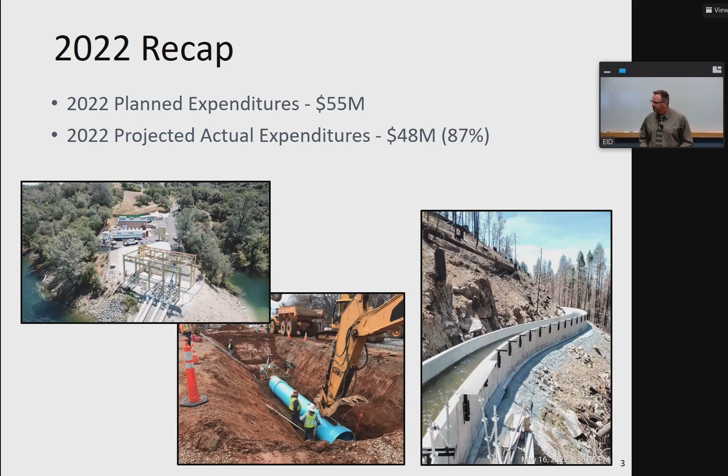Next slide. So this is a list of some of the completed projects, and I won't go through all the details of these. Elizabeth Dawson has been to the board previously with status of a lot of these projects.

But as far as some of the big ones, the Folsom Lake intake replacement was completed, the main ditch pipeline, and then we also had the Flume 30 and Flume 4, 5, and 6 replacement due to the Caldor fire. We also have wastewater collection system pipeline rehab projects completed, some of our battery storage projects at our water and wastewater facilities, and others. This is just a short list of some of them, and then we've got a lot of different projects in the pipeline or completed this last year.

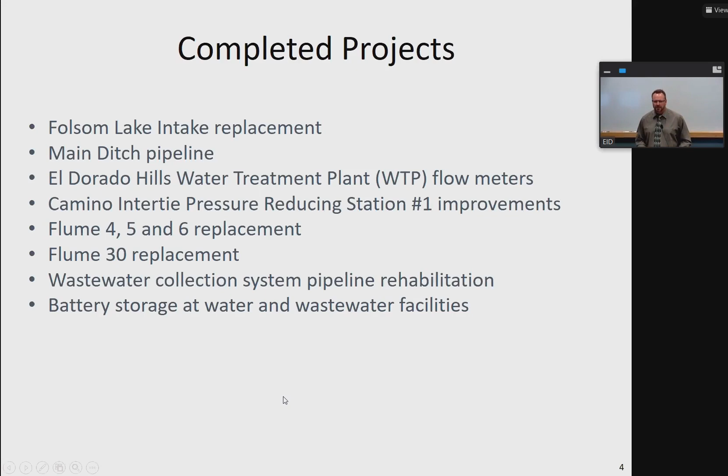Next slide. This is just some of the pictures of the Folsom Lake intake replacement. This is about a $42 million project, started in 2020 and completed in 2022. This project really improves the reliability, replaces 1950s, 1960s era pumping facilities that have been in place since then, really improving the reliability of our water delivery system, taking our supplies out of Folsom Lake.

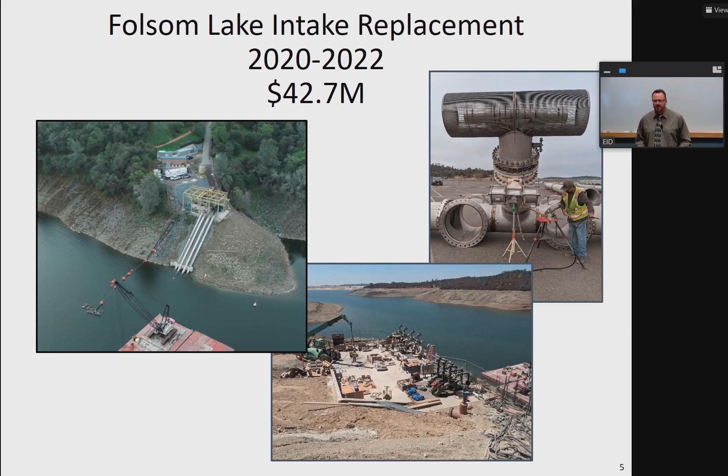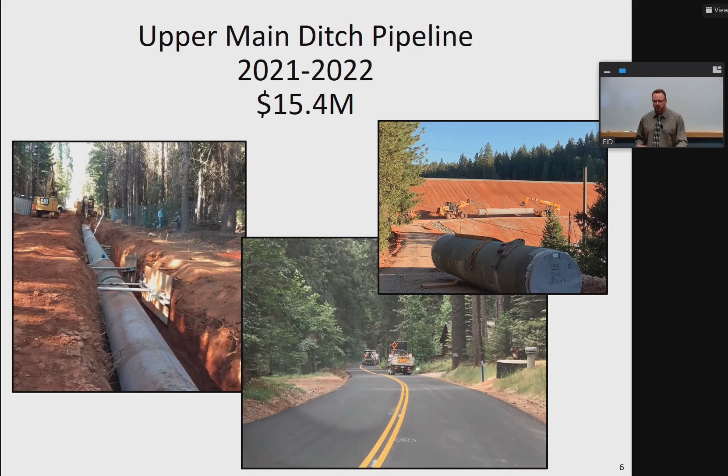Next slide. On the upper end of our system, the upper main ditch pipeline replaced our previous open conveyance. It's really going to help with improved water loss and improved source water quality to one of our treatment plants in Pollock Pines.

Next slide. And again, the Flumes 4, 5, 6, and 30 replacement, about $27 million was expended there for those 4 flume replacement projects.

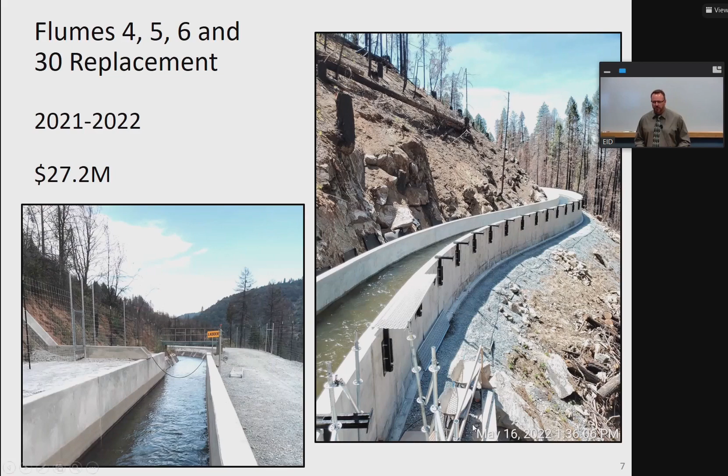Some of the projects that are under construction right now that the board has approved include the Flume 45 abutment section replacement. This is a small section of our overall Flume 45 system, and I'll talk a little bit more about future projects in the Flume replacement program. We've also got a little bit of work to stabilize some of the burn slopes resulting from the fire along the El Dorado Canal. We're in the process of upgrading our crew room up at Camp 5.

We're also going through a PLC, programmable logic controller, replacement at our Reservoir A water treatment plant. The collections facility relocation is well underway and hopefully will be completed by the end of the year, as well as the headquarters battery storage and backup generator project, which is right here at headquarters.

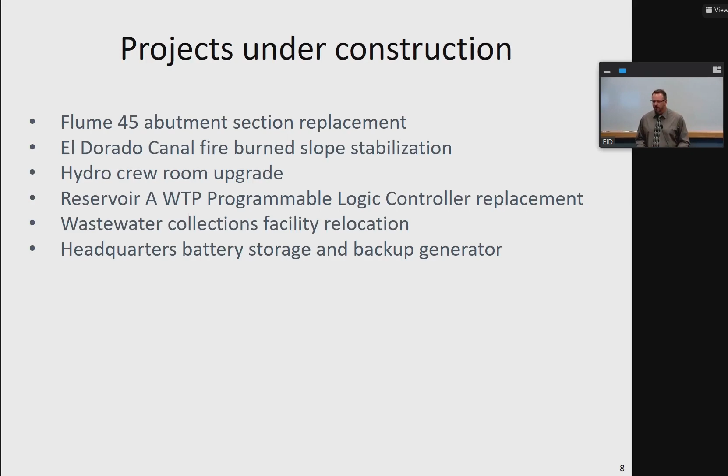Next slide. Going through some pictures and the cost of the Flume 45 abutment section under construction now is about $3.7 million. That'll replace that old section in the middle there, and also have improvements to these old rock wall abutments that are unstable.

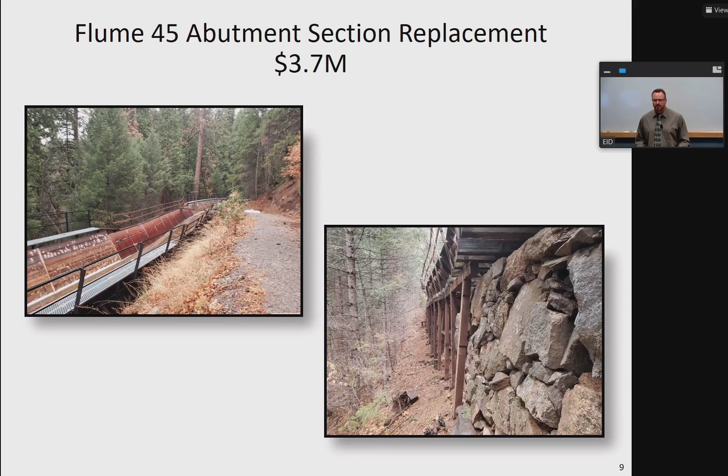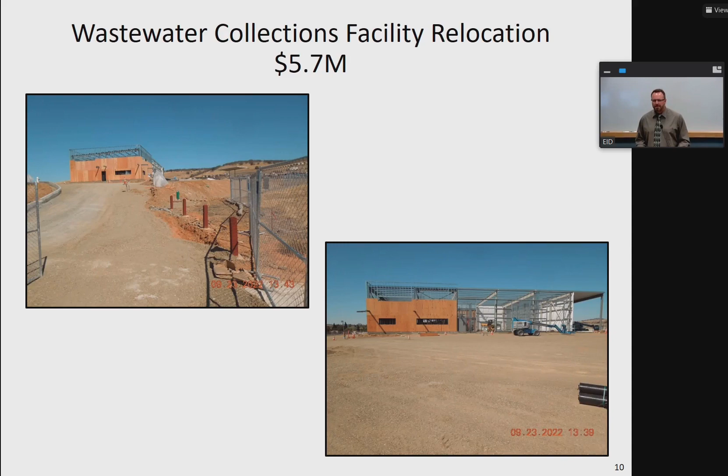And then also that will allow us to add a place of use of storage at Jenkinson Lake to be able to use that in other parts of our system. We're in the process of updating our water master plan. Also in the process of designing the Sly Park intertie replacement, which will be a large project in our next 5-year plan.

Moving into the flumes, again, Flume 45 Section 3 is under design, as well as Flume 48. You heard about the Silver Lake Dam replacement, I believe, at the last board meeting, as well as we've got some penstock improvements that's following up on some condition assessment we did on the penstock facilities several years ago.

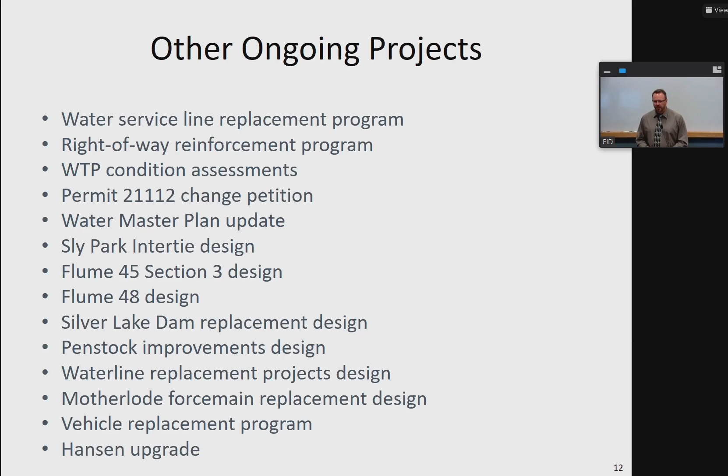So those are some of the ongoing projects. And then now moving into the 2023 to 2027 timeframe for the CIP and what we prepared. Next slide.

So each summer our staff begins this process. And it really starts with a lot of meetings with our engineers and project managers in both engineering and operations, working on updating the status of all of our projects, plugging those projects into updated worksheets and developing new funding estimates. And then we meet with each group and kind of kick around all these projects, what needs to be done now, what can be pushed off a little bit.

The initial draft that we always see always starts with a higher number, and that's what those meetings are for, to work to try to reduce that to a more realistic number as far as staff workload, as well as within our financial constraints. So this year, the initial draft totaled about $270 million. After our staff was done working through that, it was reduced to about $230 million, which is what you see before you today.

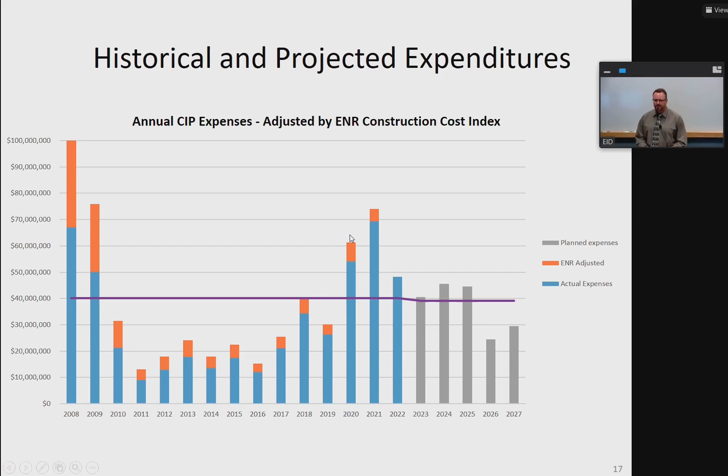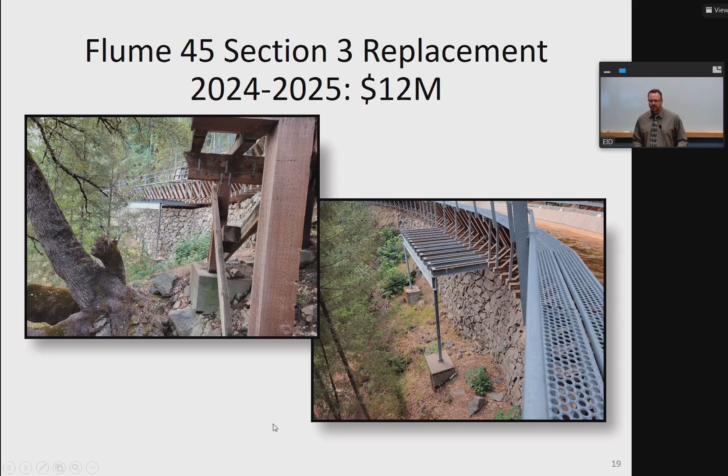This is the Flume 45 Section 3 replacement.

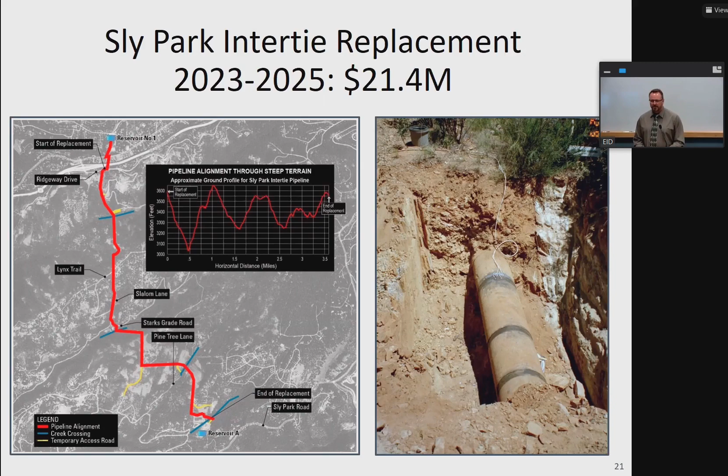We've got several water treatment plant improvements that aren't yet identified as specific projects. We've been going through condition assessments of our treatment plants, specifically focused on Reservoir 1 and El Dorado Hills water treatment plants, since that's where a lot of our future expenditures will need to go toward replacing assets. So we've got about $12 million identified right now in the 5-year plan.

A lot of that isn't solid yet as far as what projects would be funded, and that number could definitely increase. We just need about another year to go through the process to identify those projects, their timing and cost, to then plug that into the CIP.

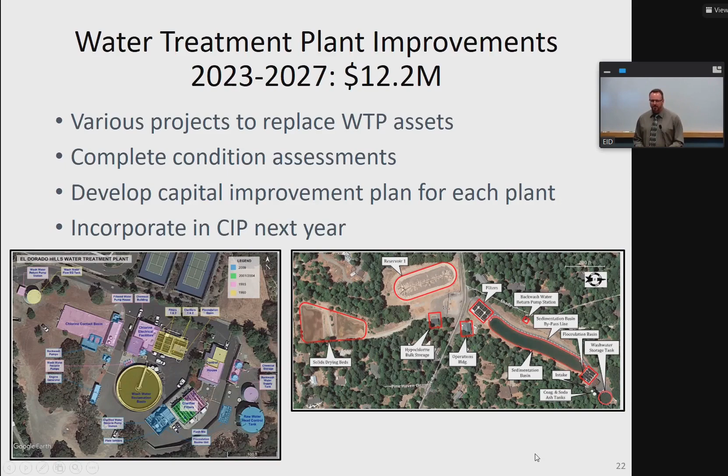Moving forward with water line replacements, we've got about $21 million over the next 5 years for replacing water lines. At the top of the list is a water line on Forebay Road that's a real leaker, actually impacting our 14-mile tunnel that goes under Forebay Road into Forebay Reservoir, as well as Drop-off Road nearby.

Also a pipeline in Sly Park Hills that feeds a tank up there. So those are the 3 main water line replacement projects, but we've also got about $5 million beyond those, planned annually between 2025 and 2027.

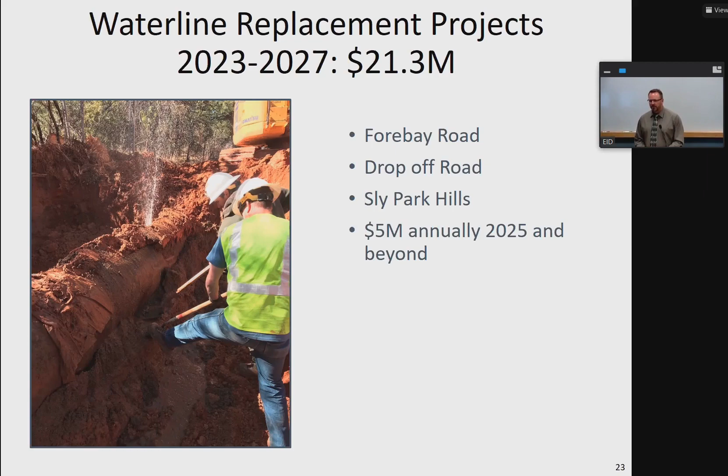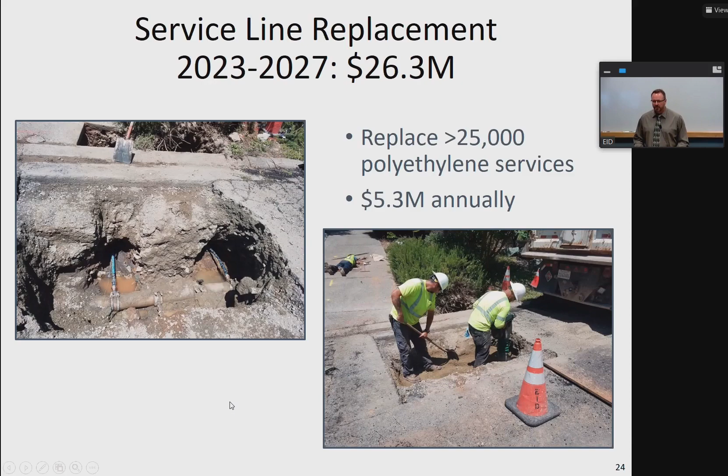We've also got our ongoing service line replacement program, about $26 million total, continuing to plug away at replacing service lines, about $5 million annually.

I mentioned the Silver Lake Dam replacement, about $3 million slated right now in the 5-year plan. This is for the design, environmental, and permitting aspects. Hopefully by next spring we'll have about a 30% design completed, which will include a construction cost estimate.

So this time next year, as we go through the CIP process, we'll have those construction dollars and a better sense of the timing for that project.

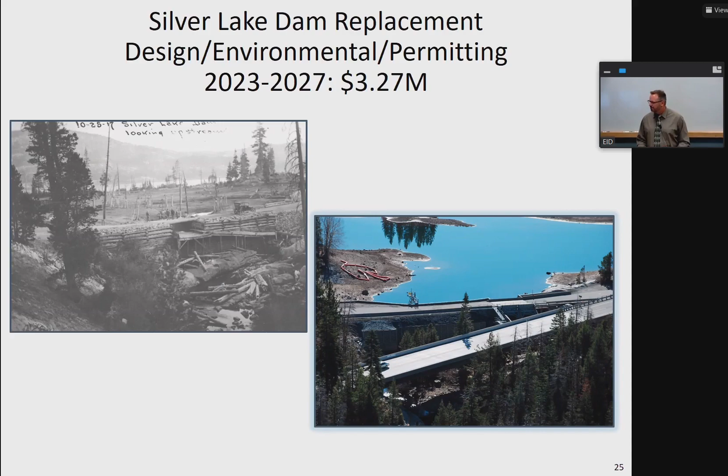Can you give us a ballpark? I know we tried this last time. Well, with our experience on Forebay, you'd think that'd be kind of a benchmark, so I'm guessing 40 to 50 million. I hope it's not that much.

I think it's going to be cheaper than that, but I don't know. If you're comparing with Forebay, all we're talking about here is concrete, and it's probably going to be like a 1-year project. As soon as it's open and the snow melts up there, we've got to get in, tear it out, replace it, and get it online before next winter. So it's not going to be a long, 3-year project like Forebay was. I'm hoping it comes in lower than that.

Okay, we won't hold you to it. We'll wait till we get the actual numbers. Thanks. Yeah, sure. Thank you.

Disappearing ink there, yeah. No, but the YouTube tells everything. Yeah, that's right.

Moving on to the wastewater side, we've got about $10 million planned for wastewater lift station upgrades. These are the pump stations that pump water over the hills to our wastewater treatment plants. There are 3 specific projects: Indian Creek Lift Station off Missouri Flat Road, and one of our largest lift stations in El Dorado Hills.

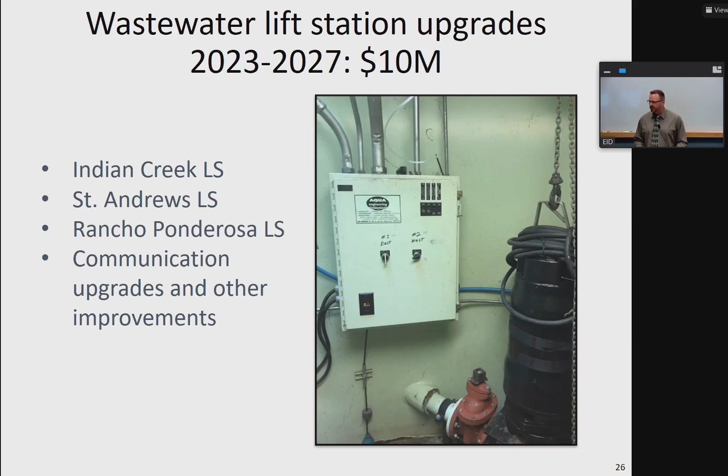The St. Andrews Lift Station, and then a small lift station, Rancho Ponderosa, in the Shingle Springs area. Besides improvements to the lift stations themselves, we've also got communication upgrades and smaller improvements to keep those running well.

For pipeline replacement on the wastewater system, the larger one is the Mother Lode Force Main replacement. We've got that under design and scheduled for construction in 2023, with about $15 million estimated for that project.

The Strolling Hills sewer line is a downstream component of that whole Force Main system, also in the 5-year plan. Liz will actually have a project today for replacing some gravity lines, using slip lining or small replacements across our overall collection system gravity pipelines.

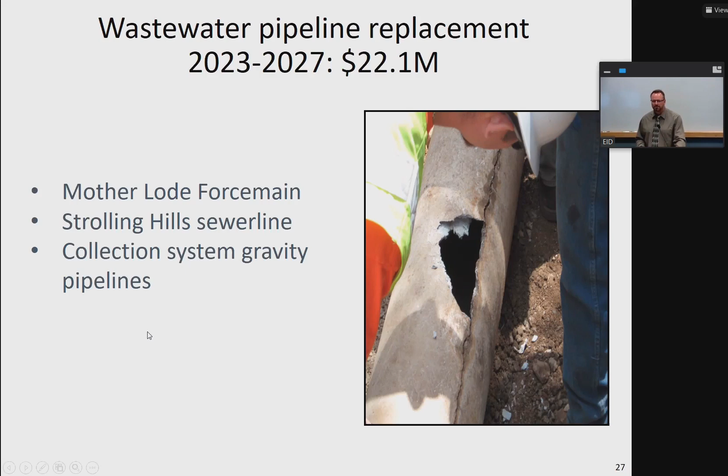And then finally, general district projects. These aren't specific to water or wastewater, more general projects including our Hansen 7 software replacement — we're in year 2 of a 3-year program for that. Our vehicle replacement program is about $8 million over the next 5 years, and various improvements to our IT systems are about $4 million.

We also have improvements to both our SCADA system and communication system between facilities, as well as safety or security improvements, about $2 million. And we've got facility improvements identified at the existing headquarters building — I believe the roof needs to be replaced, or the air conditioning unit. This building is getting fairly old and is due for some replacements.

So that just covers most of the projects, and then we get into the financing and how we're going to pay for all these projects. And like we do each year, we try to identify some of these larger projects that would fit a future bond issuance. In the last financial plan that was adopted, we identified a future bond issuance of about $100 million.

That was forecasted to be in 2025. We think, and we'll get into this in the next meeting as we go through the budget and updated financial plan, that this may need to be accelerated into 2024. But we'll have more info on that at the next meeting.

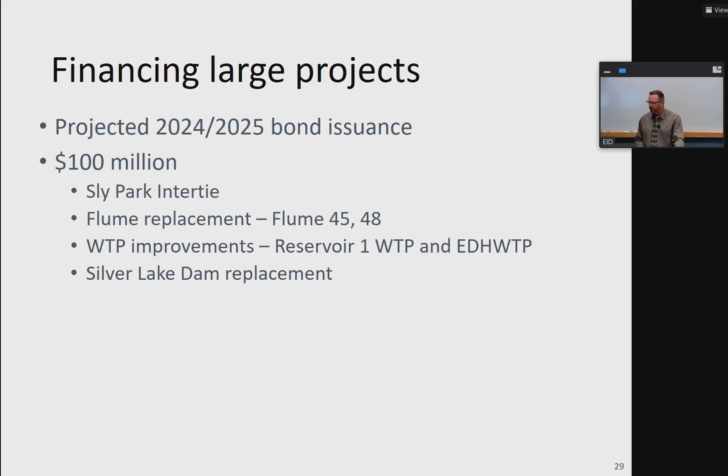Hey Brian, just to Director Dwyer's point about debt service - the $100 million a couple years ago with interest rates then versus what interest rates are now, we don't know what they'd be next year or in 2024, but probably higher. I think that's something we're going to have to talk about, a grave concern - the impact of $100 million at 5% versus when it was 2% or something like that. We need to be aware of that, especially for next year.

Certainly, before we go through and recommend issuing $100 million worth of bonds, we have to do a cost of service study update to determine what the rates would be. And I don't like going to bond like maybe some of the past general managers did. I'd like to go to bond with an approved financial plan and rates adopted by the board. It just works better with our bond rating folks as well. So yeah, the whole package.

Well, the evidence of that is what happened when we did the refinance, and the savings we realized from that was great. Thank you, Financial Department, for doing that, and Board. And so that did give us a little bit of headroom. It would seem to me that as we retire some of the previous bonds, then we bring the new bond issue on board, and again keep steady state instead of getting all these ups and downs.

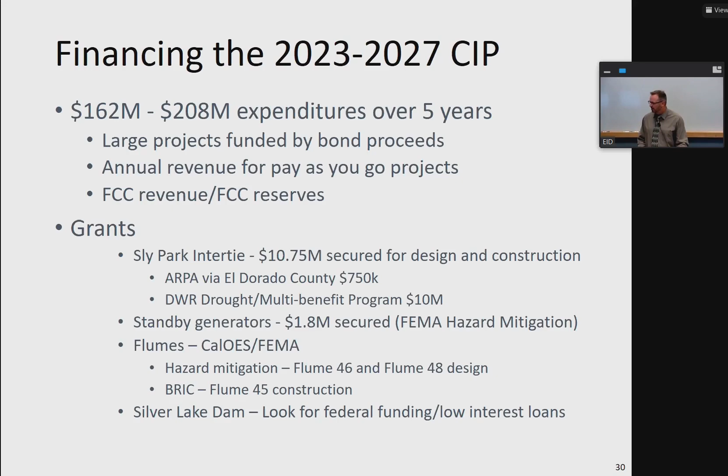So that's it for next steps. We'll possibly make further revisions based on any board or public input, incorporate the CIP into the operating budget and financial forecasts, and review that at the next meeting, along with the budget workshop, bringing back the CIP for formal board adoption.

Well, thank you for that. Any questions or comments? Yes, Director Veerkamp.

Hey Brian, Diamond Springs Parkway, I know that's finally going to get done, the second phase. Is there anything over there that we need to be concerned about? We'd talked a couple years ago about stub outs or sleeves, so in case there was any service needed to the north, we'd put it in once instead of digging it up again.

Are you talking about the connector between 49 and Missouri Flat? I think that's been planned for, but I'll make sure to check. I know we don't have a plan to put the whole pipeline all the way across. I think we discussed that, but it would be good to have some provisions in case of expansion, because I'd hate to go back in and dig that all up.

And in downtown El Dorado, there was a stormwater project being discussed. I know we've got a main that goes down through there too that I think has failed in front of Poor Reds. Just as long as that's on the radar screen too, if the county moves ahead with that project, it might be a good time to do it all at once.

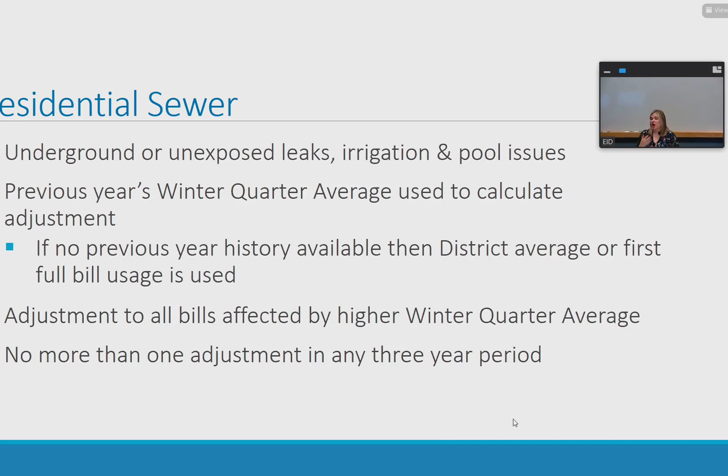For the actual bill adjustments, we adjust all bills affected by that higher winter quarter. So it may take a customer a bill or two to realize, hey, why is my sewer high? They might not connect that filling their pool in January caused this higher charge. Once that is approved, we go back and adjust those higher bills and set them to the lower charge going forward. For residential sewer, we allow no more than one adjustment in every 3-year period. Because they're set once a year and stuck with that charge for a whole year, we make that frequency a little more lenient than water.

For commercial sewer, we bill every 2-month bill, and it's directly related to how much water they use. Most commercial customers will have a separate landscape meter to subtract that off, but whatever water they use in that bill, they're billed for sewer on that bill. The way we calculate for commercial sewer, again, it's underground or unexposed leaks. We're not worried about pool filling for commercial businesses.

We will calculate their adjustment based on last year's water charge, and we allow no more than one adjustment in any 1-year period for commercial, because they have 6 new sewer charges every year. The frequency is higher than residential, which is only calculated once a year.

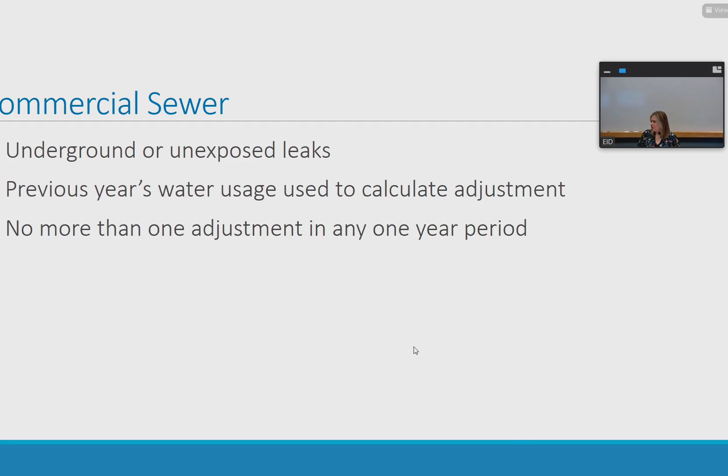Next slide. Okay, so next is our customer outreach. Oh, that's okay. No, that's perfect.

We actually have a lot of information on the website, so we're going to skip ahead to an example of the website, and then we'll go back to the rest if you want to go to the next slide.

If we go back to the previous slide, some other information we do is our waterfront. We put information about our winter quarter average in there. We also participate in what's called Fix a Leak Week, that Communications helps put on to encourage customers to check for leaks and how to do that.

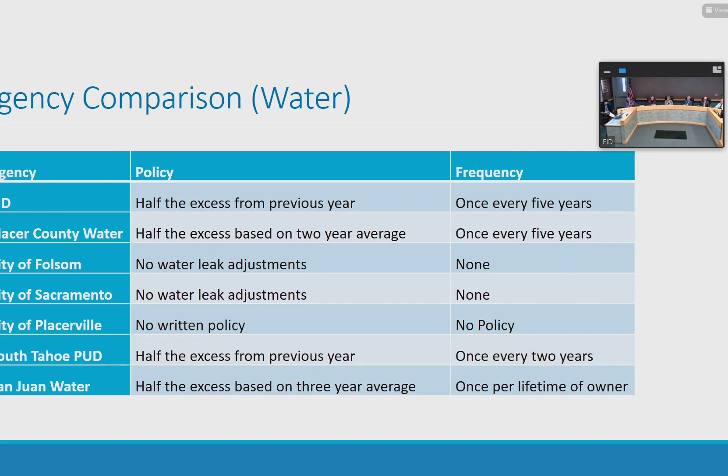Okay, and that concludes my presentation. Are there any questions? Well, I want to thank you - it's a very professional, well-done presentation, a lot of preparation goes into it. I think it's useful for the public, but just as much for us board members to know this, because we get these questions and maybe we can help you guys in answering them. So thank you. You're welcome.

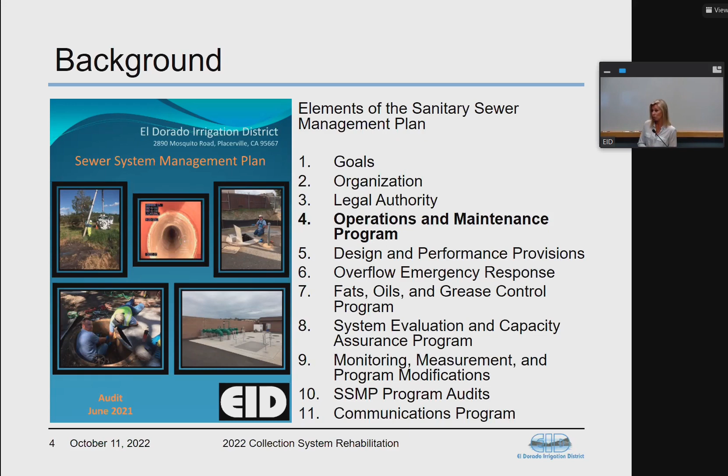That SSMP is pretty comprehensive. It covers all of our district collection system assets, starting from the district's sewer cleanout on private properties, through the lower lateral, through the gravity main, and in most cases to a lift station, force main, and then to our wastewater treatment plants, which have separate permitting for those facilities.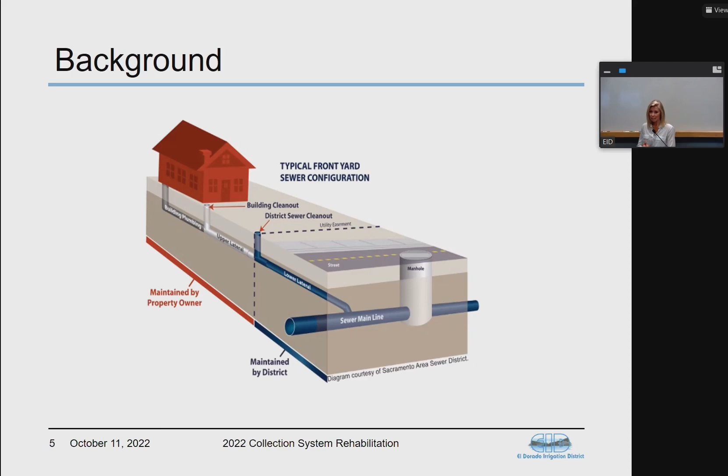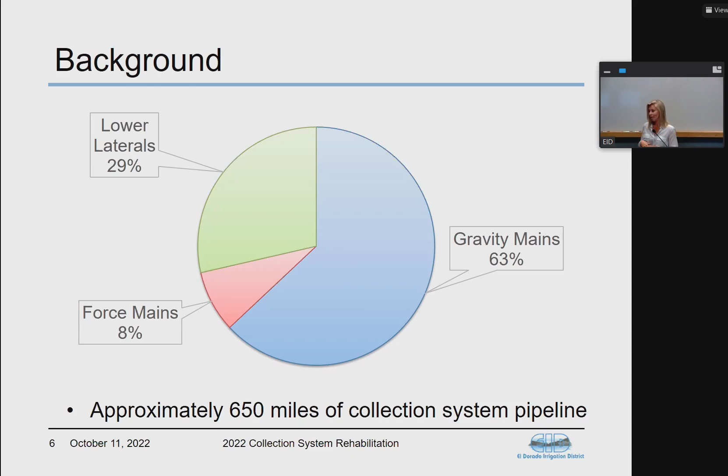The district has about 650 miles of collection system pipeline. About a third of that is our lower laterals, over half is our gravity mains, and a small percentage is force mains. Those force mains, when we find deficiencies, tend to bubble up into their own projects due to cost and scope of repairs needed. Through the gravity mains, a lot of minor deficiencies our crews can address in-house on short notice, but if they're a little larger, we like to bundle those up into this type of project.

As far as an overall composition and makeup of our collection system, a good majority of our pipe is PVC, which if installed correctly, that's a 100-year asset. As we do our regular cleaning and inspection, those seem to be holding up moving forward.

Unfortunately, we tend to see issues with our AC pipe, which is asbestos cement pipe, that is susceptible to hydrogen sulfide corrosion. We also have vitrified clay pipe, which is corrosion resistant, but unfortunately it's a very brittle material. As roots start to infiltrate or ground settles, we start to see cracking, and that eventually leads to structural failures and potentially potholes in the roadway.

The large pipes under the street can be 3 feet in diameter, sometimes bigger. What are those typically made of? So we have spiralite, we also have some concrete pipe in place, and we do have some HDPE, which is also a plastic pipe, corrosion resistant. It's just the makeup is a little bit different.

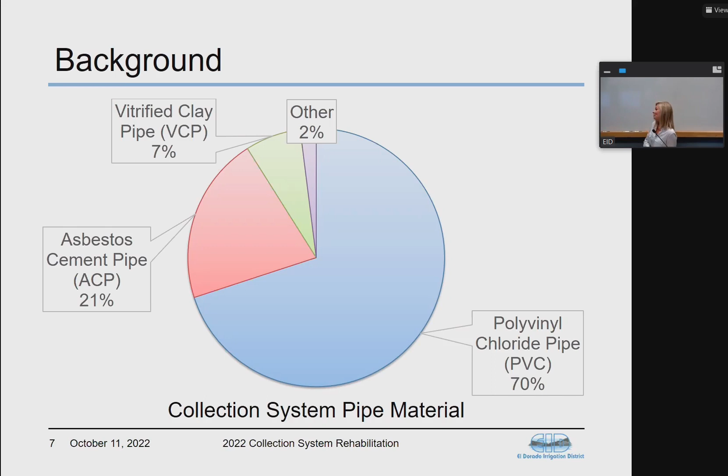Okay, so, yep. All right, next slide.

When we find deficiencies in our gravity system, CIPP is a great option we can look into. Unfortunately there are a few caveats. The diameter, to be cost effective, really needs to be less than or equal to 12 inches. The deficiencies need to be cracking or offset joints - once we have a full collapse, we need to go in and replace that section. The cross-sectional area needs to be mostly circular - if it's ovaled, unfortunately that liner doesn't provide a structural replacement.

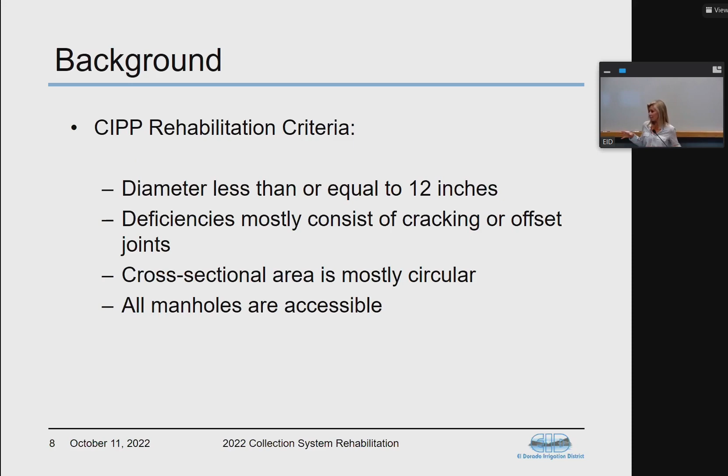And then all manholes need to be accessible, because really that's how we launch the liner, through those existing manhole structures. Next slide. Alright.

I wanted to include this little picture because I think it does an excellent job of highlighting the fact that we are getting a pipe within a pipe. It's the same end result, but minimal surface restoration. Sometimes we'll have to go in and do minor point repairs, but for the most part we can leave this ground undisturbed - no paving, no landscape restoration. It's pretty much a pipe within a pipe. We do have a slightly less diameter, but we've typically noticed hydraulically, because it's a smooth wall pipe, we don't have any hydraulic impacts because the water can move quicker through that pipe - less friction.

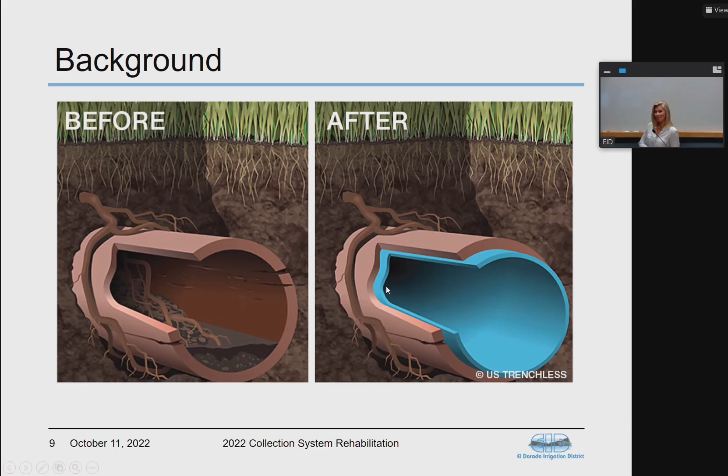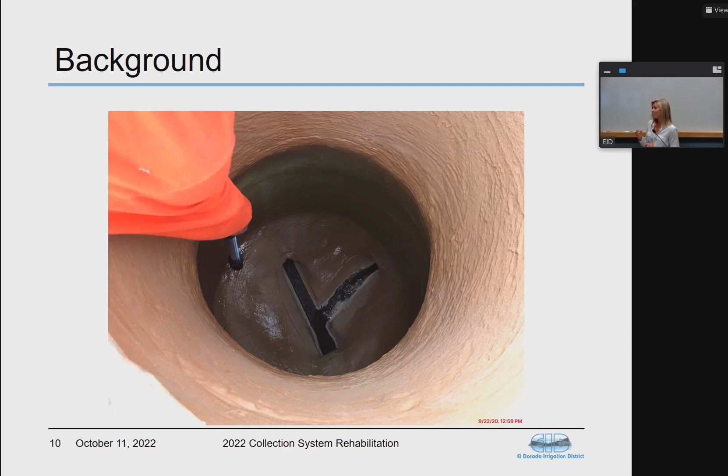Alright, next slide. This is a picture of a manhole that we recently rehabilitated through our 2020 contract. Manhole rehabilitation isn't just painting on that liner - it's really removing the old. In this project we have a T-lock liner, so removing the old lining system, prepping the concrete surface, doing patch repairs, replacing the iron - so replacing the frame and cover on top - and then applying this very thick lining system that is actually a manhole inside of a manhole.

So the scope of this particular project, like I stated in the summary, is rehabilitation of 16 manholes, replacement of 2 manholes, installation of 2,300 linear feet of cured-in-place pipe, and installation of 78 feet of replacement pipe. I did want to make 2 special notes on this slide: this work will require night work as well as bypassing.

A handful of the manholes included in this project are downstream of the St. Andrews force main, so it's very turbulent flow, very prone to corrosion in that particular area, and it's on Silva Valley Boulevard, which is right next to that trifecta of schools. So to adhere to our El Dorado County Department of Transportation encroachment permit, we are doing all of those rehabilitations at night.

And also for the pipeline, in order to maintain our sewer service to our customers, we've given the contractor the option of going upstream and installing a Vactor truck and pumping out those flows, moving it downstream, or going as far as installing a trailer-mounted pump and then above-ground piping.

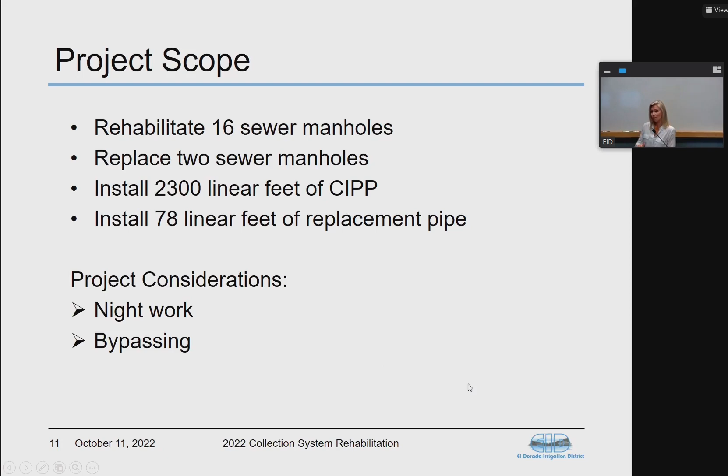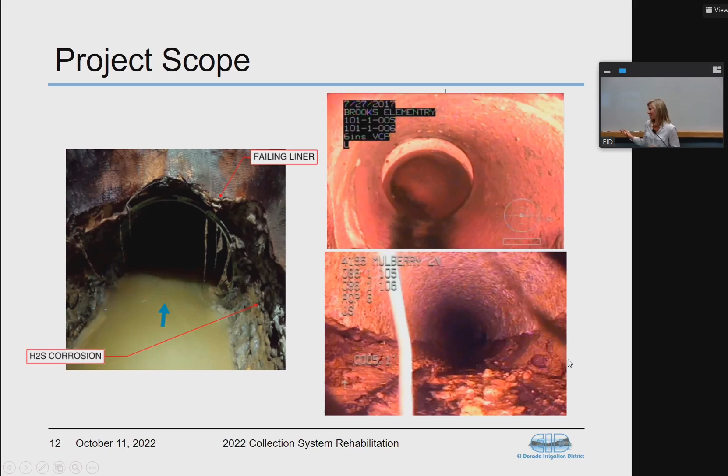Next slide. I did want to mention project benefits. This is not just a Band-Aid fix; it really does add another 50 years of useful life to our assets. It does reduce I&I, inflow and infiltration. Tracy and his crews work diligently during our wet weather flows to try to mitigate higher flows or address pump issues, and this overall reduces that I&I volume. It also reduces energy costs associated with pumping and wastewater treatment, and it's a root intrusion reduction, which reduces the possibility of blockages, prevention of structural failures, and the unfortunate situation of sinkholes in public right-of-ways.

So we definitely want to get ahead of these failures before they become structural failures. The CIPP method involves minimal ground disturbance and minimal construction duration, which all leads to a lesser construction cost. It's a better, more cost-effective way of addressing our deficiencies in our system.

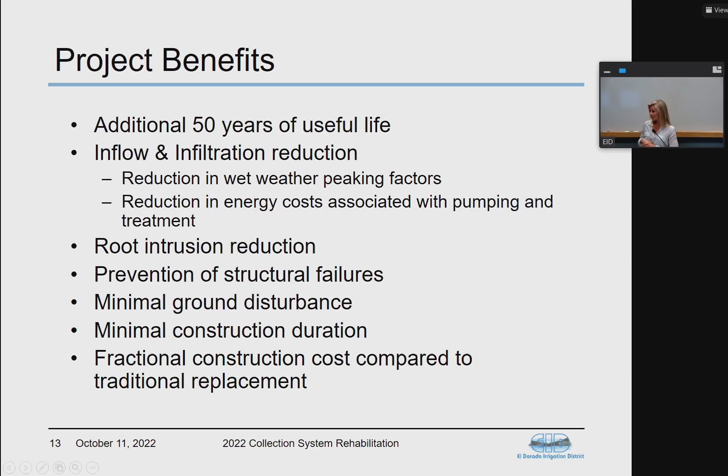Next slide, bid process. The project was publicly bid in August of 2022. A mandatory pre-bid meeting was held on September 8th, and bids were due on September 20th. The pre-bid meeting was attended by 2 contractors. This type of work tends to be very niche, and there's just not many folks out in industry that do this work. Luckily, we did receive at least one bid, less than the engineer's estimate.

Express Sewer and Drain did our previous lining project, and they did an amazing job. Very cost-conscious, they looked at some cost savings measures during the project, and they worked very well with our constituents who were impacted by the project.

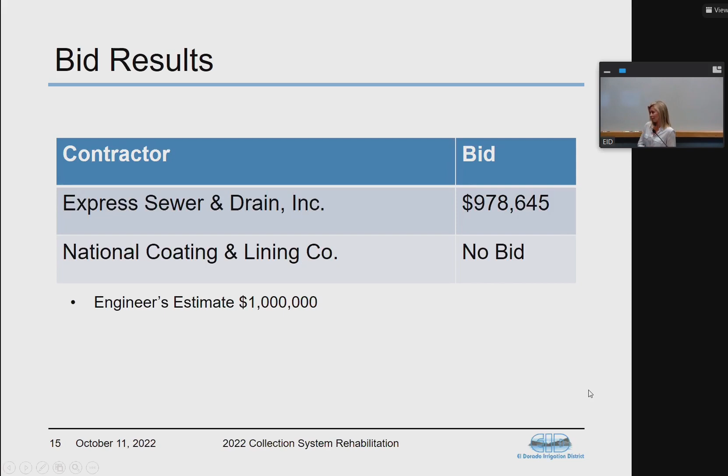Next slide, environmental. Staff has determined that this project is categorically exempt from CEQA. Also, if the board decides to approve this project, staff will file a notice of exemption from CEQA with the clerk recorder's office.

Next slide, public outreach. After today's meeting, if we decide to move forward, an initial courtesy notice will be mailed out to all the residents, and then we'll have an additional 48-hour notice. Last time we worked with Express, we designed our flyers to have our information as well as Express's information, just so that if there's any issues, we give them options of how to reach anyone as quickly as possible.

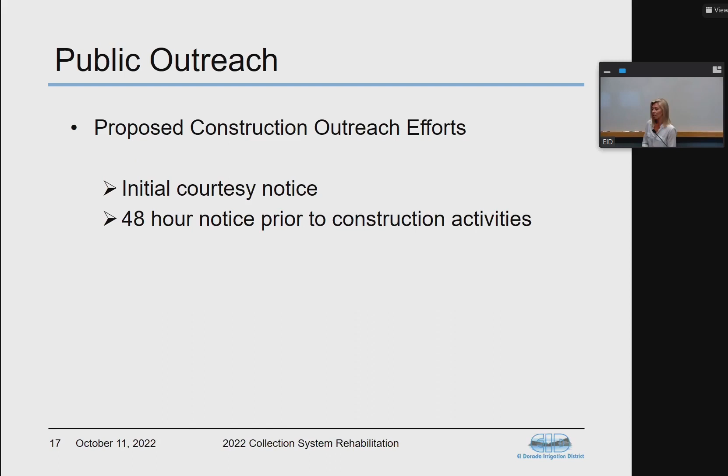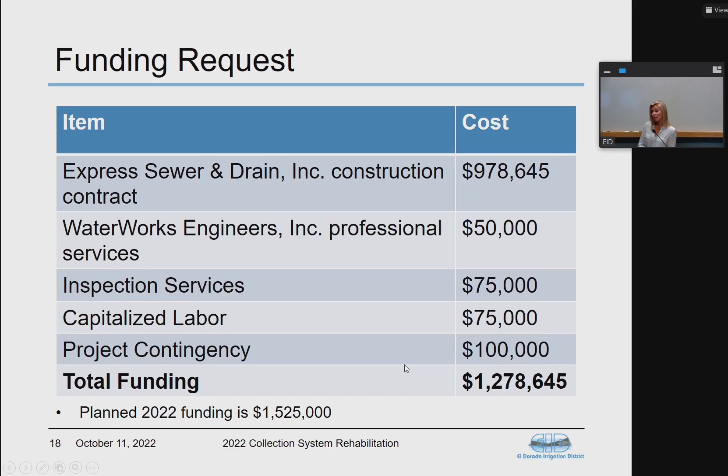All right, funding request. Today we are requesting funds for the construction contract, which is $978,645, an additional $50,000 for professional services for Waterworks Engineers. They were the design engineer on the project and have done an excellent job to date, so we'd like to retain them for review of submittals and RFIs. Also $75,000 for inspection services, $75,000 for capitalized labor, and a contingency of $100,000, for a total funding request of $1,278,645. I did want to note that the funding in the CIP was about $1.5 million, so we are within the funding projected on last year's CIP.

I'll move option one, and I'll just say, since I've been on the board, I'm going to sound geeky, but I'm a fan of the modern sewer system. It is an amazing thing, and I know most people don't think about it. I didn't used to—you put something down the garbage disposal or you flush and forget. But it's the way the system is set up and what it does for us. It's an amazing thing. So thank you.

Yep, absolutely. We do. I'll second. Okay, and for the record, Liz was just going to read the option.

Option one: award a contract to Express Sewer and Drain, Inc. in the not-to-exceed amount of $978,645 for construction of the 2022 Collection System Rehabilitation Project, and authorize additional funding of $50,000 for engineering construction support, $75,000 for inspection services, $75,000 for capitalized labor, and $100,000 in contingencies, for a total funding request of $1,278,645 for the 2022 Collection System Rehabilitation Project, project number 21018.01.

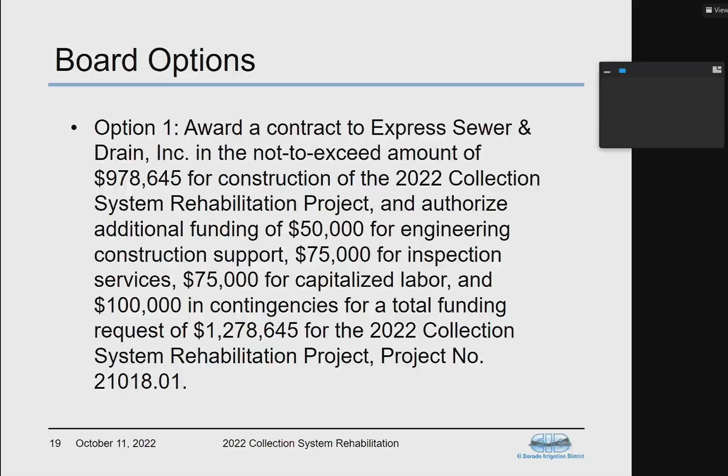What say you? We'd like to usually make it quick. I'll move option one, with a note that the supply chain issue rears its ugly head again.

There's a motion by Director Veerkamp and seconded by Director Osborne to approve item number 13, that's expenditure of $218,775 to purchase meters.

Rachel? No, just, okay, good.

I think we kind of rushed through, and that's okay. I think it's really important because the meters generate our revenue, and stuck meters and failed meters are lost money to the district. So I think it's a real important topic, and thank you for staying on top of it and keeping them fixed and keeping the water flowing and the money flowing.